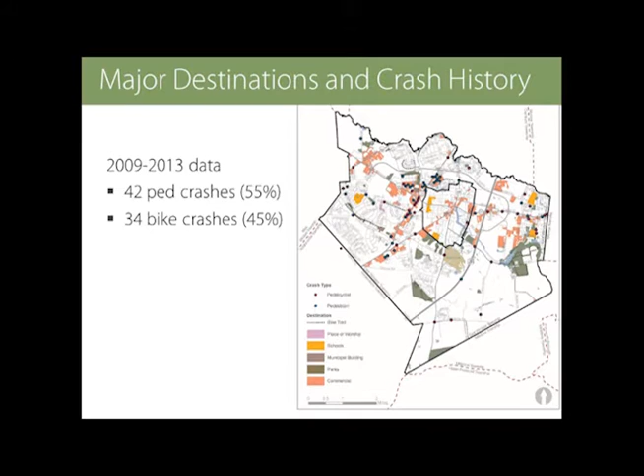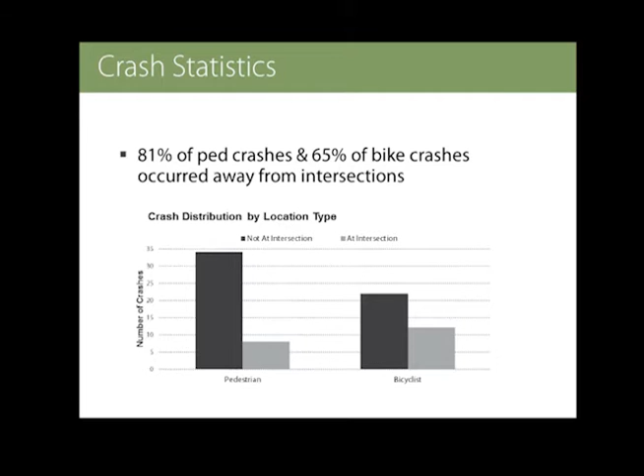As far as pedestrian crashes go, some of the bigger clusters were actually in parking lots around town, some of the larger shopping plazas. One of the more notable statistics we saw: the vast majority of both bike and pedestrian crashes actually occurred away from intersections—81% of pedestrians and 65% of bike crashes, about 20 percentage points higher than the statewide average. That points to more corridor-wide issues rather than spot locations and crossing issues—could be gaps in the sidewalk network, maybe a need for more mid-block crossings, those sorts of things.

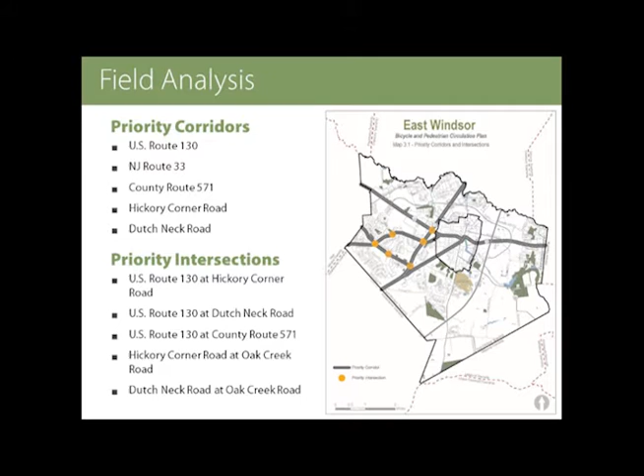Based on what we saw in the crash data, and also local input we got from the study advisory committee, we focused our field assessment on 5 of the key corridors in town: Route 130, Route 33, 571, Hickory Corner Road, and Dutch Neck Road. Then we targeted the key intersections along those roads: Route 130 at 571, Hickory Corner, and Dutch Neck, Hickory Corner at Oak Creek, and Dutch Neck at Oak Creek.

Based on that, some observations about the general strengths and existing resources the town has. The typical local street is generally very bicycle and pedestrian friendly. A lot of the older neighborhoods have a fairly continuous sidewalk network, and the streets are generally low volume, low speed, so they're comfortable for cyclists. The town's already doing a lot of improvement activities at intersections—for example, this is Dutch Neck at Oak Creek, which recently had sidewalk gaps filled, new curb ramps, and crosswalks restriped.

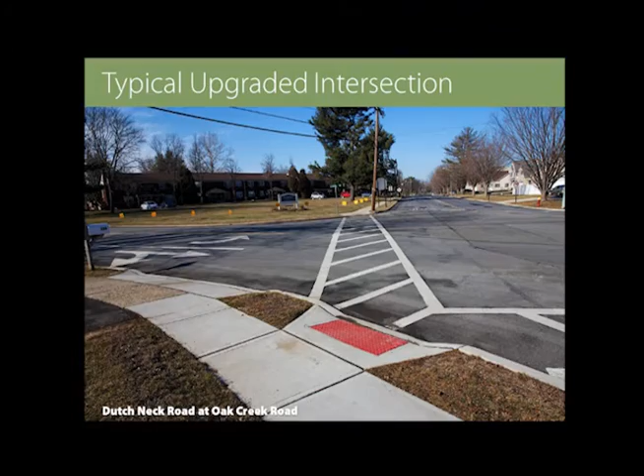Some of the signaling along Route 130 seems to have been updated fairly recently—it meets current standards, with pedestrian signal heads and countdown timers. And as Pete mentioned, the town has a lot of great off-road trail facilities. This is just a map of all the trails—about 9 paved and unpaved trails, and another 3 or so multi-use trails that have gone in with some of the recent development. So there's a lot of great trails to work with; it's just a matter of trying to knit them together.

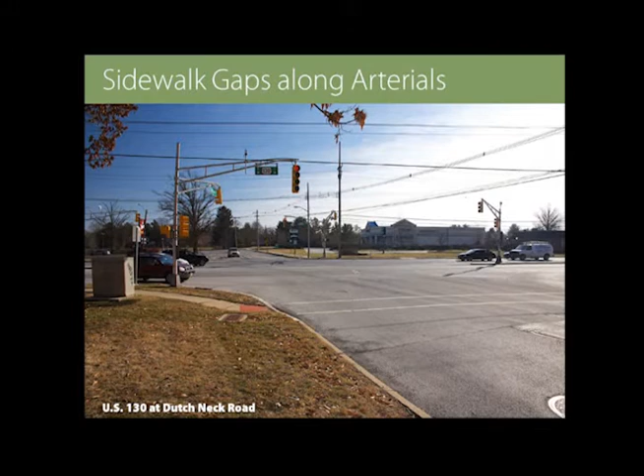Accessibility of the pedestrian signals was also something we saw fairly frequently. The pedestrian signal heads have been updated recently, but the pedestrian push button isn't easily accessible from the sidewalk, which is obviously an issue if someone is mobility impaired or has a stroller.

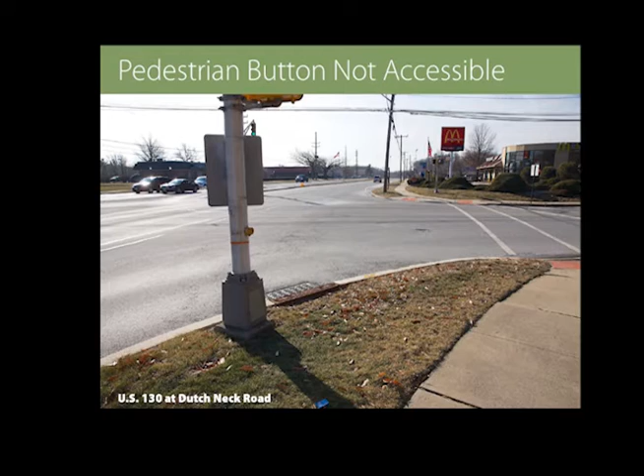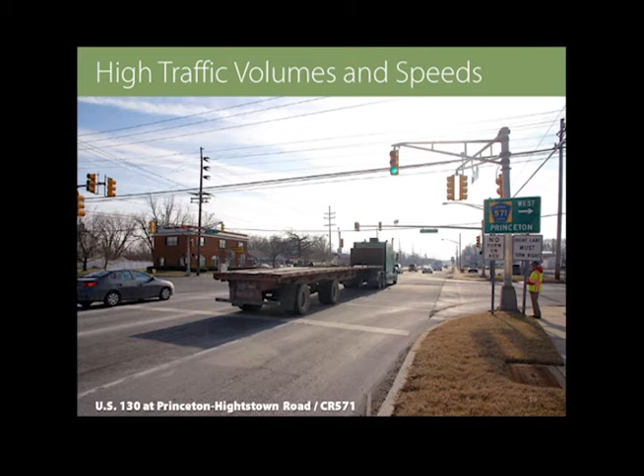A lot of the arterials are major truck routes with high traffic volumes and high traffic speeds, so it's generally an unfriendly environment for bicyclists and pedestrians. Not a whole lot you can do about that, but it's a context issue to be aware of.

A lot of the residential streets are very wide, so there's an opportunity to install bike lanes or bike infrastructure. But wide streets without anything there can also encourage speeding, so that's a deficiency as well.

We also did a bike network analysis. For this, we looked at bicycle level of traffic stress, which is a metric that helps quantify user comfort, how the cyclist perceives the roadway. It's driven by three main factors, one being traffic speed.

Obviously, the higher the traffic speeds, the less comfortable cyclists tend to be. It also looks at the number of lanes, which is a proxy for exposure to traffic volume. Most cyclists are less comfortable the more cars they're sharing the road with. It also looks at intersection treatments, particularly when low-stress streets cross a high-stress street. How is that situation dealt with? Is it easy to cross, or is it a stressful environment?

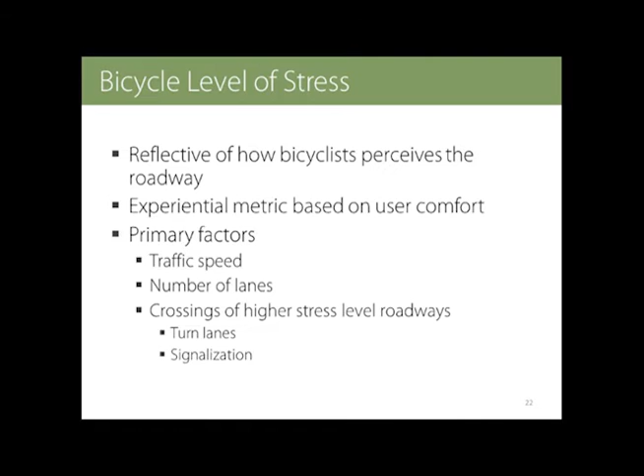The metric breaks things down into four levels. Stress level 1 is comfortable for most users, including children. Stress level 2 is comfortable for most adult riders. Stress level 3 is comfortable for more enthusiastic riders who have a bit more tolerance for riding with traffic. Stress level 4 is for your most experienced, fearless, confident riders who aren't afraid to ride in most conditions.

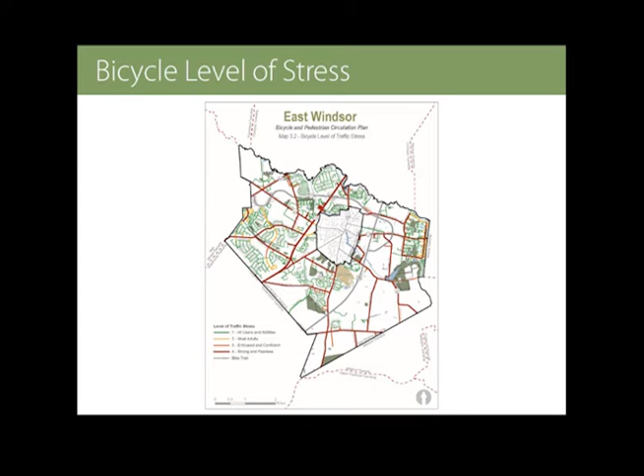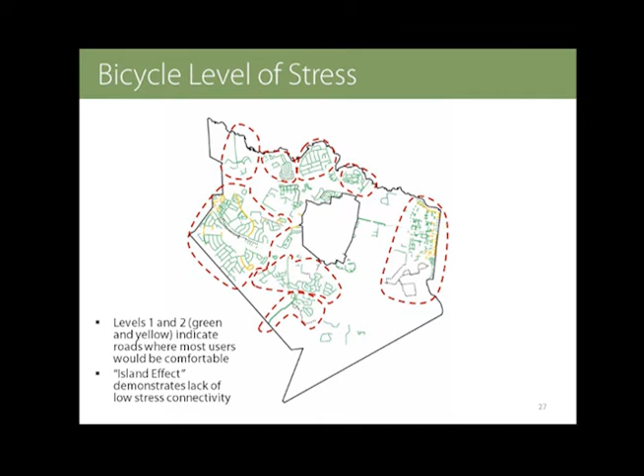If we take those high-stress roads out of the equation, you can see the residential neighborhoods are really fragmented. There's basically nothing, just islands, low-stress islands with no easy connection between them. For example, you have the Twin Rivers area over here to the east, and there's no easy connection to the rest of the municipality.

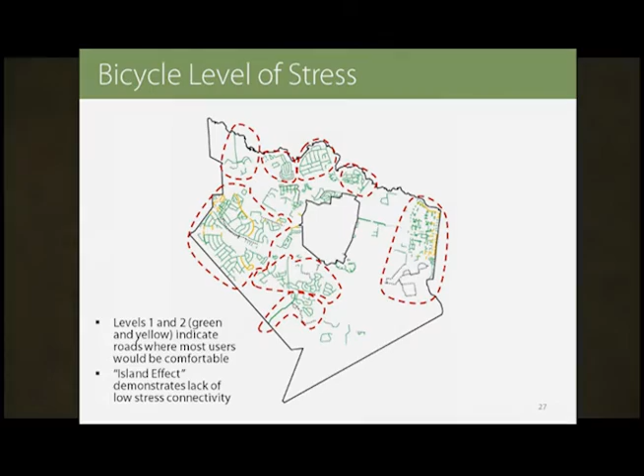So the key takeaways from the existing conditions analysis: in terms of crash data, most of the things we saw were along the main arterials. At the signalized intersections, ADA compliance was the main issue, just making it more accessible. The medians on Route 130 might be an opportunity to provide some pedestrian refuge islands. In terms of corridors, there's an issue of filling in sidewalk gaps. The bike network, as we saw on that map, the high-speed roadways really fragment the low-stress network. And in terms of trails, a great asset, it's just a matter of providing more connectivity.

Based on that, these are our draft recommendations. At each of the signalized intersections we looked at, we provided some more detailed guidance on pedestrian improvements. They're detailed on the boards in the back here, but in general it was about filling in the sidewalk gaps, better access to the pedestrian push buttons, improving the curb ramps where needed, and improving pedestrian lighting, those sorts of things.

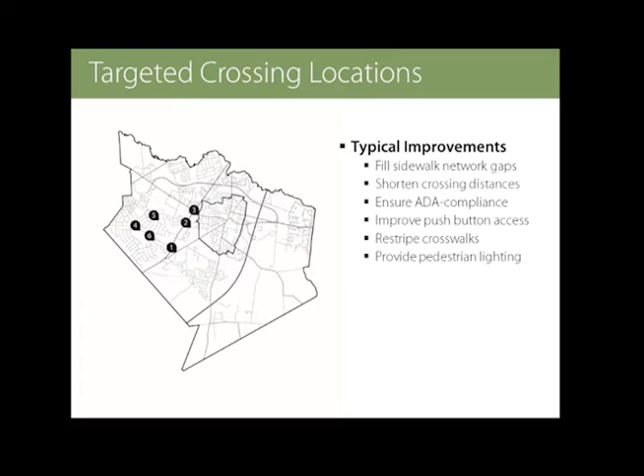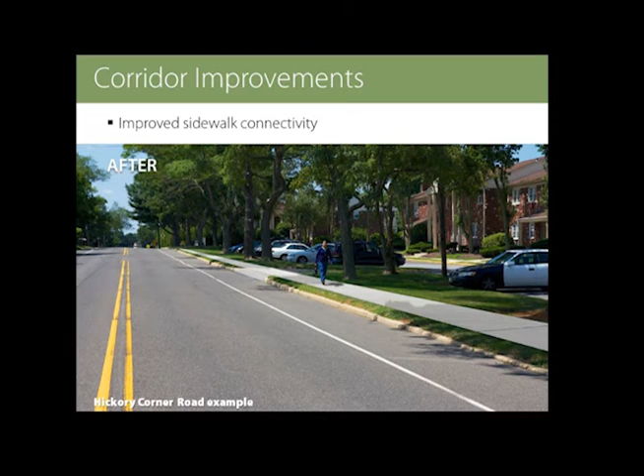In terms of corridors, again, filling in the gaps in some of the network on some of the key roadways. Just an example of a photo sim on Hickory Corner Road.

The preferred treatment would be more pedestrian priority, where the sidewalk gets pulled across the intersection and the motorist actually comes up to sidewalk grade. This basically makes them more aware that they're crossing a pedestrian realm, and slows down turning movements.

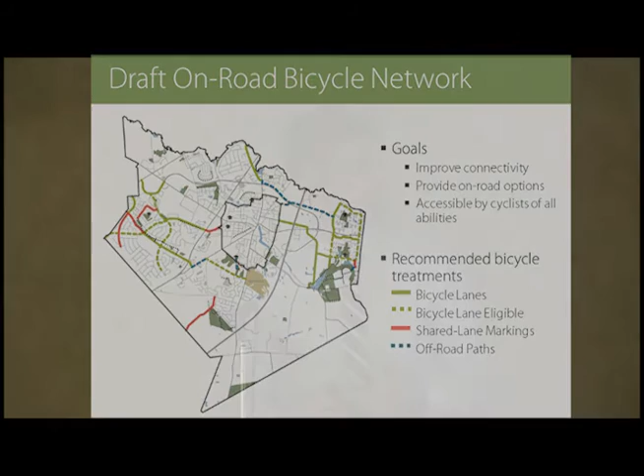So we're trying to provide that low stress level 1 or 2 facility. We recommended a series of either bike lanes, shared lane markings in a few locations, and some improved off-road paths.

This is just a breakdown of the main network map. These are where some of the bike lanes were proposed—for example, Dutch Neck Road, Hickory Corner, connection on Milford here to connect into the Twin Rivers area, to connect that to Hightstown.

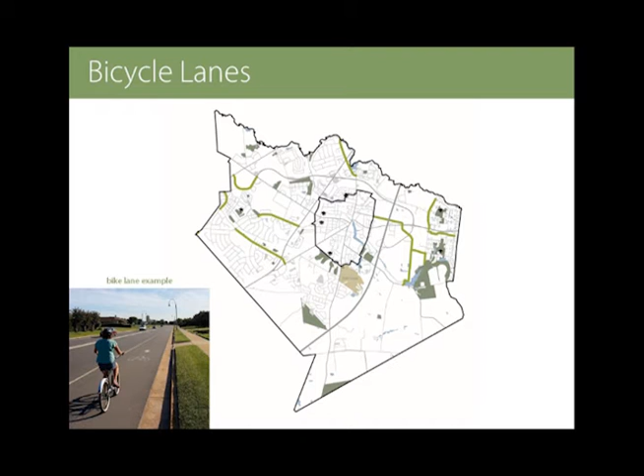Shared lane markings—not really a facility type per se, but kind of an enhanced signage. It's a good way to link key destinations, fill in gaps in the network, and connect the trails to where we proposed some bike lanes.

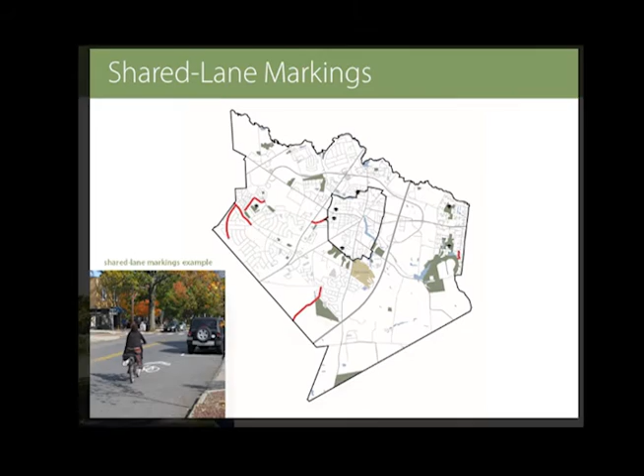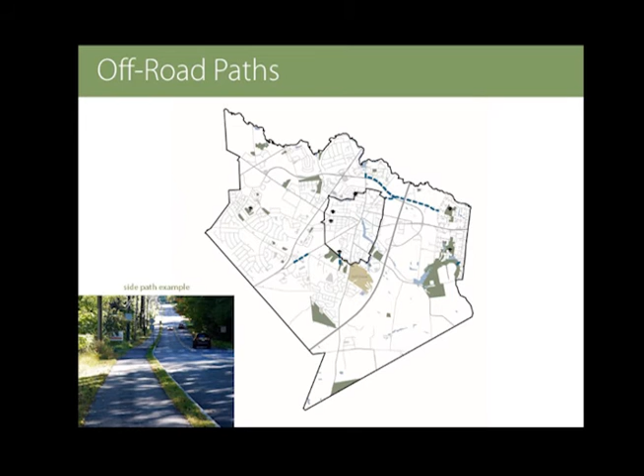And then along some of the higher speed roadways, we recommended some off-road side paths. For example, a short stretch of 33 would connect a bike lane coming in at Hickory Corner to the proposed one on Airport Road, and then another connection to the Twin Rivers area.

Then we also looked at the trail improvements. This was all about improving the low stress network. We looked at enhancing some of the crossings with better signage and better striping, and we had three tiers of trail improvements. Phase 1 was building off things already recommended in previous studies, really focusing on connecting the existing facilities.

Filling those gaps. Phase 2 is some shorter links that would improve overall connectivity. They may not have been studied in as much detail yet, but they could really create a more robust network overall.

And then phase 3 was very conceptual—more about looking at potential opportunities, things that might warrant further study to connect East Windsor to the regional trail network, for example, to the west towards the D&R Canal.

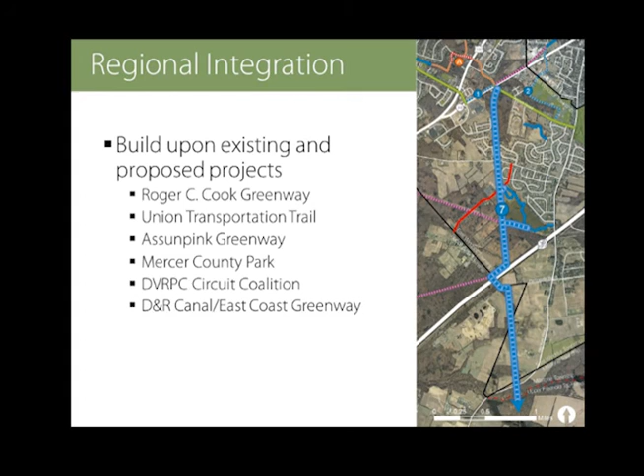So we tried to build on some of the existing work that's been done in terms of the trail system. Just a list of some of the studies and existing facilities we were trying to link to—Roger C. Cook Greenway, for example, and the Union Transportation Trail, which you see as this link in blue here, connecting from the southern part of town towards the south.

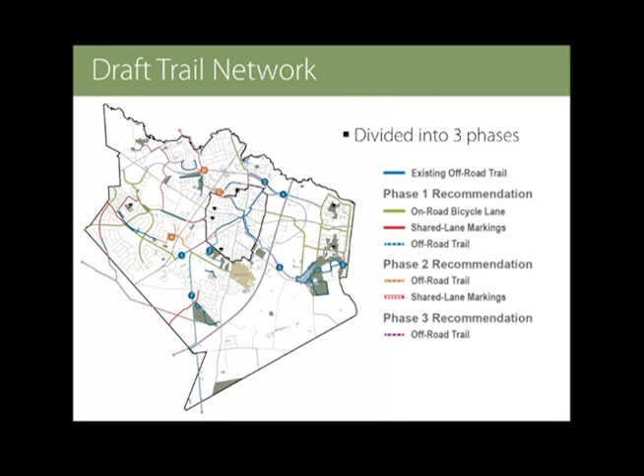And then the phase 3 lines are in purple. Again, those were the high level, potential for further study—looking at what existing rights-of-way might be able to be used in the future. So we looked at, for example, a utility line right-of-way down in here that might be able to connect Turnpike Park towards the west and the D&R Canal.

We also looked at access to schools. In a lot of places that was building off what the town's already done with some of their Safe Routes to School applications, reinforcing and filling in some gaps in the sidewalk. This example shows the recommendations around the high school.

So we recommended some bike lanes along Airport Road and a sidewalk along the south side of the road, then improved crossing to connect the sidewalk in these residential neighborhoods to the PAL complex here, and then some maintenance and repair to the existing paths there, extending those paths across the park to the high school.

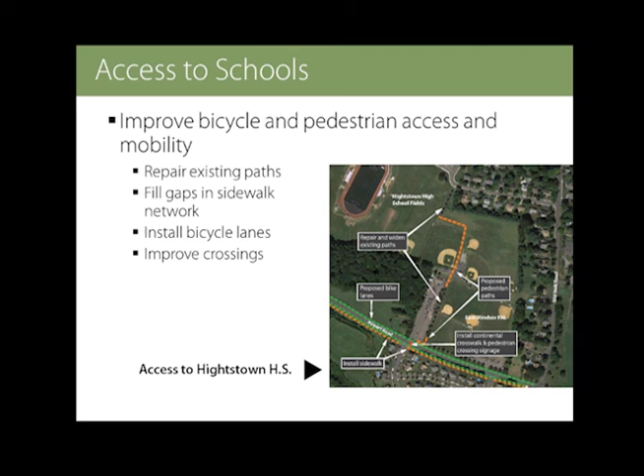So as mentioned before, any feedback here tonight will go into the final report, get that to the town, and then from there, hopefully, they can use that to pursue grant funding and, over the long term, start to implement some of these improvements and build a better network for bicyclists and pedestrians in East Windsor.